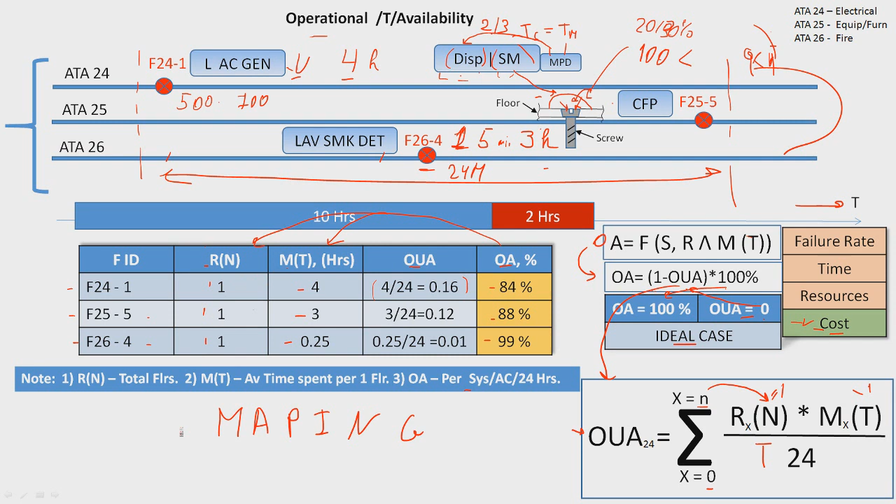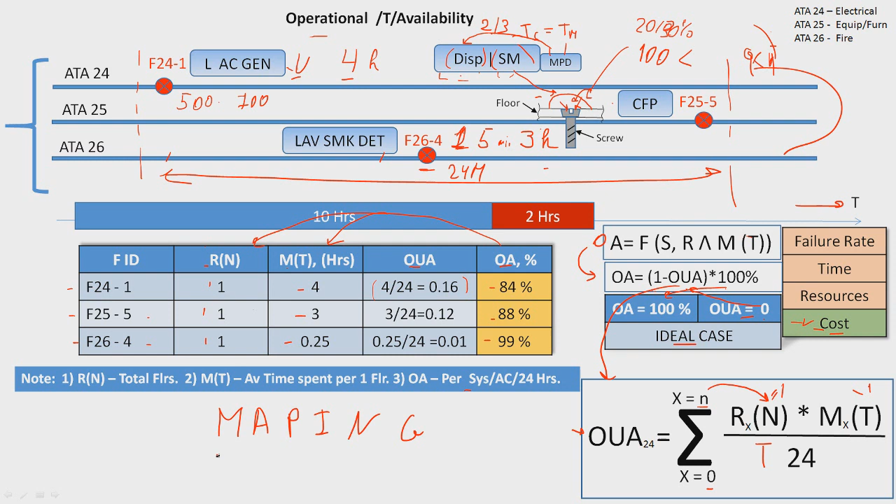So the question is, how are we going to identify how our system works, whether it's effective or not, from all these contributors' perspective and numbers. The answer is simple: proper and accurate mapping helps us see where our business stands. We need to map all these OAs, costs, MTs, RNs, etc. We will see how our business model is effective and profitable, because at the end of the day, business should be profitable. That's why we have this business. Okay, let's move to the next slide now.

Future of aircraft hangar maintenance. Let me give you a story why I included this slide in this presentation, because I think it's appropriate here. One day I was surfing media and saw an article, Future of Aircraft Hangar Maintenance, written by a group of authors. I started reading, and they showed this nice, beautiful hangar with huge displays and new technology items, with the aircraft in the middle, everything shining, everything perfect. When I finished, I said, something is missing here.

And I recalled a story. A long time ago, I worked on a project about civil aviation aircraft maintainability. I had discussions with operators, manufacturers, and then my professors too. One day my professor asked, what do you think is the most maintainable item that humans have invented and developed in the whole history? I was a young engineer, and I honestly didn't know. I told him I didn't know.

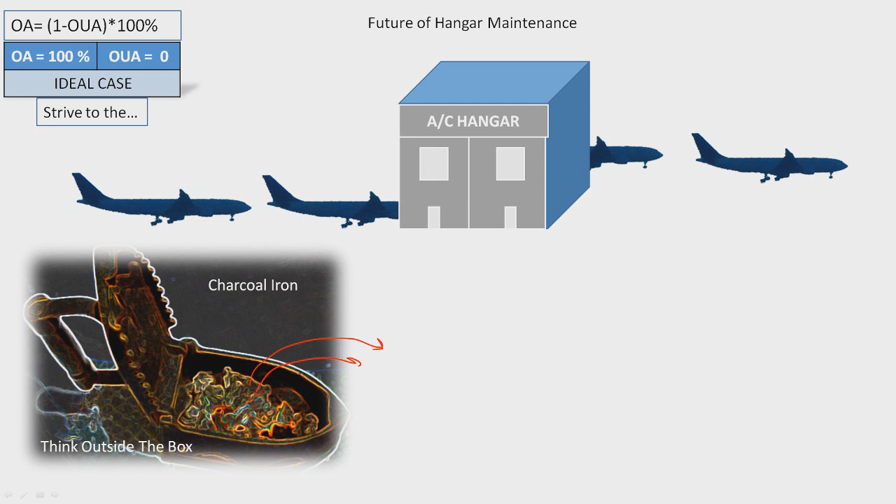So what the team was saying is, let's say today we have a maintenance check that takes 20 days. I don't remember the exact dates, I'm just assuming. But for tomorrow or the future, they're saying that since the aircraft is in the hangar, let's put 10 days. But my question was, what about the ideal case? Because if the aircraft is in the hangar, it's not zero, but the ideal case is operational availability equals 100% when out-of-service time equals 0.

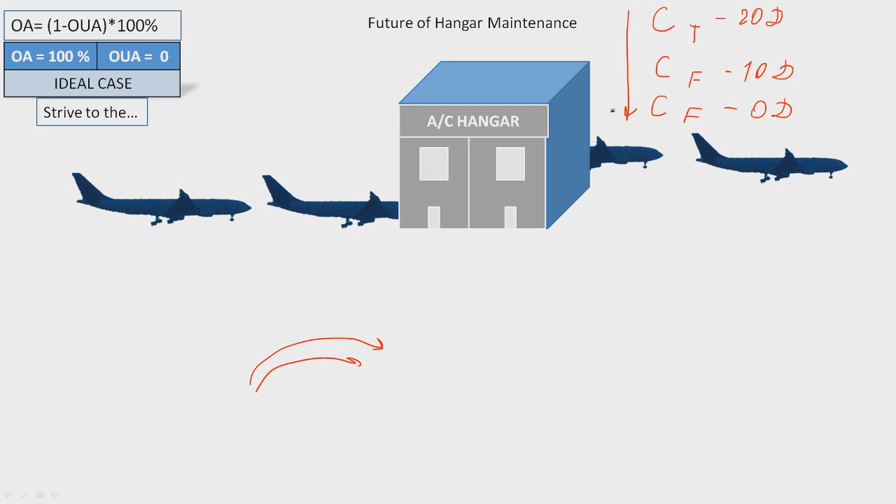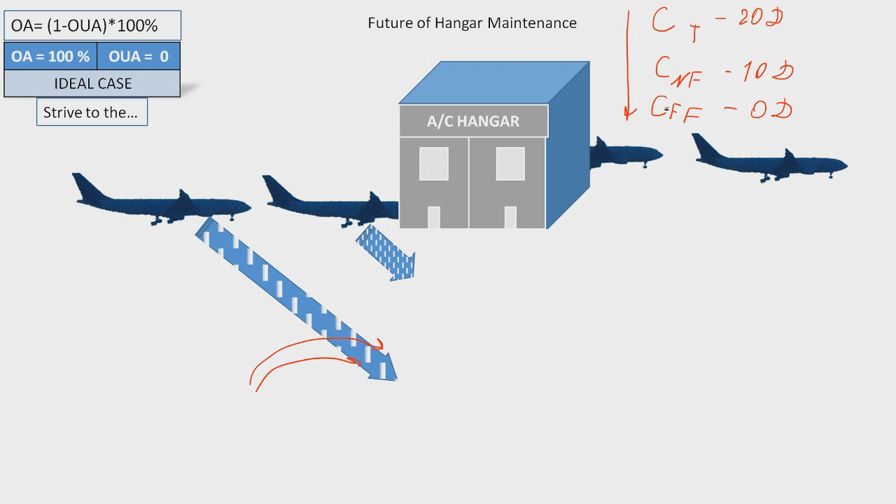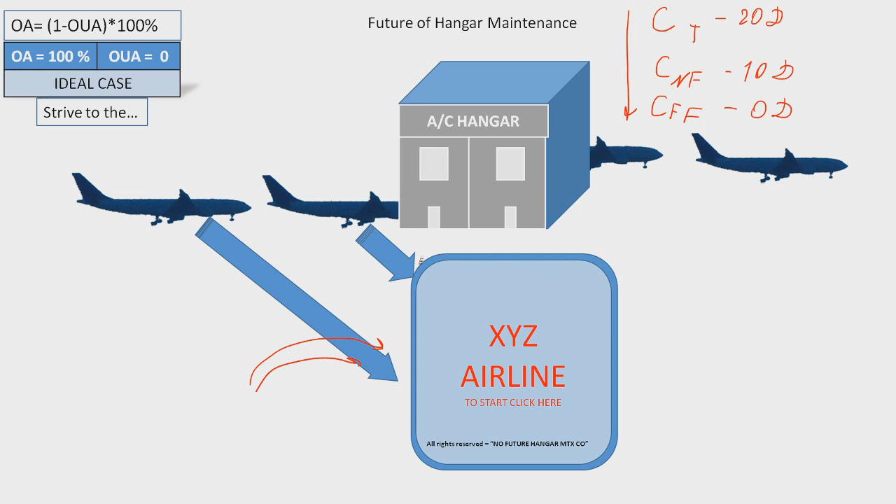I said, oh okay, now I understand what's missing here. The team is missing one word: near. They are talking about the near future of hangar maintenance. I'm talking about the farther future of hangar maintenance, or just maintenance in general. In that farther future, the mechanic should have only one small computer, or maybe this computer should be inside the aircraft in the cockpit, scanning the system from tail to nose and telling the mechanic what to change and when to change it, without sending the aircraft to the hangar.

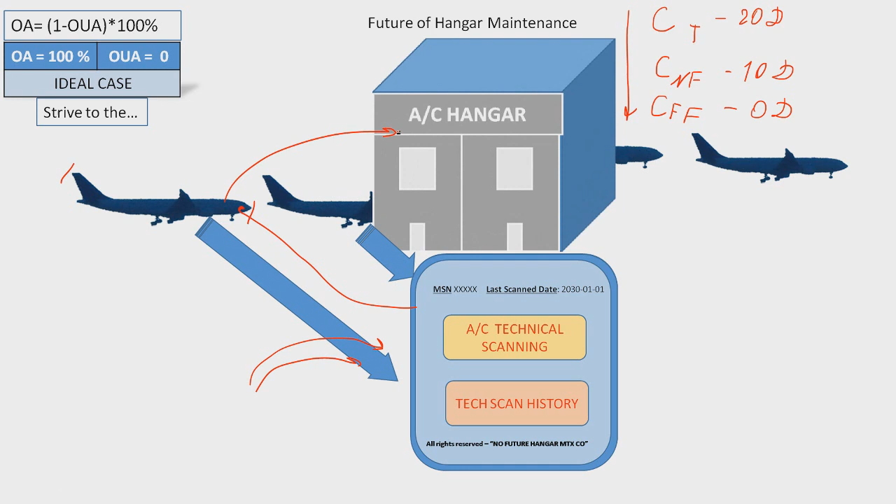And answering the question, what is the future, the farther future, of aircraft hangar maintenance? No hangar maintenance at all. We have to strive for the ideal case. We have to strive for operational availability of 100%. We have to strive for the best. And what is the best for airlines in terms of operational availability? It's zero days in the hangar.

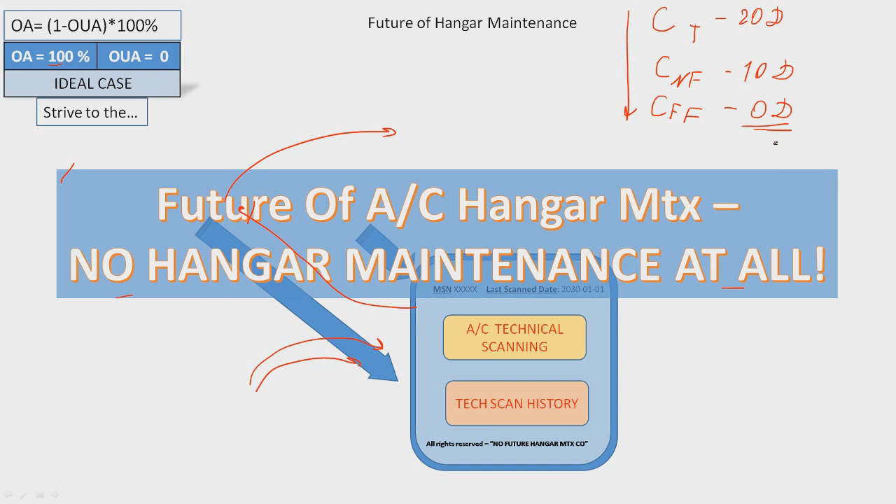So answering the question, what is the future, the farther future, of aircraft hangar maintenance? The answer is no hangar maintenance at all, zero days in the hangar. And that was just a small tip of the iceberg called Understanding Airline Reliability.